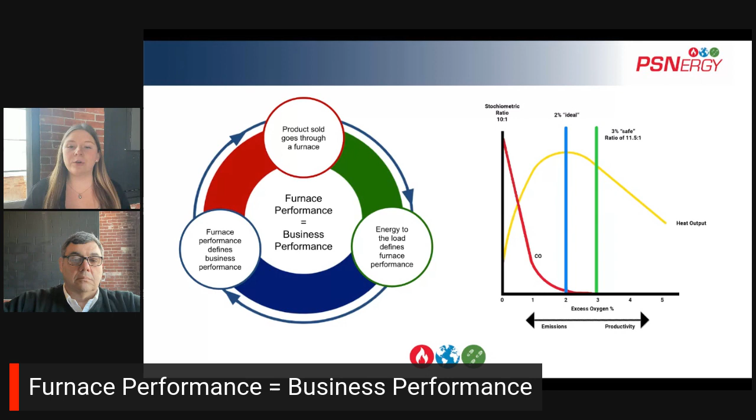and primary metals processing. Before we jump into it, let's do a quick recap. In our previous live event, we discussed the relationship between furnace performance and business performance, especially when everything you produce goes through a furnace. So fundamentally, we like to think of it that furnace performance equals business performance. And additionally, we reviewed that combustion is simply chemistry, and because of that, there is a right way to run it. And when you don't run it the right way, it can cost your business a lot of money.

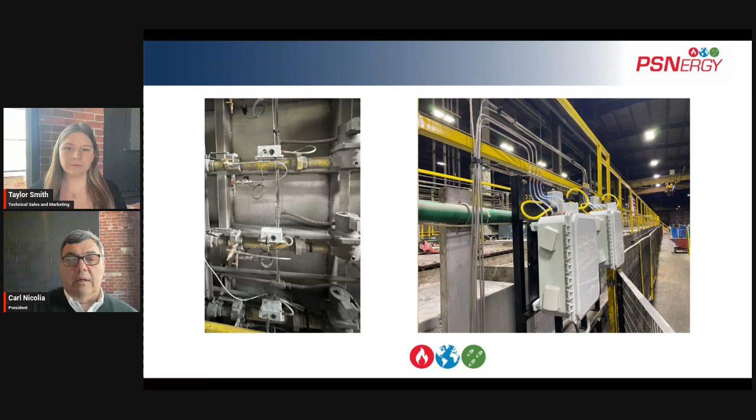Then we discussed the difference between I think my combustion is running well and I know it is running well. We don't accept I think in any other critical situations, so why should we accept it in industrial combustion when safety, quality, delivery, and business performance are all on the line? That's right. Remember, industrial furnaces are operating at very high temperatures, often in challenging environments, so they are constantly changing and degrading. And these combustion changes don't operate on a fixed schedule. So the only way you really know is monitoring; combustion monitoring is really key to operating your furnace and your business optimally.

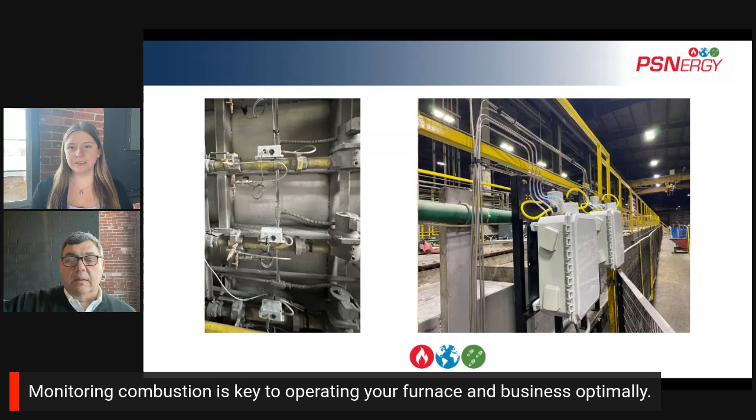And then we talked about a solution to monitor existing combustion processes. That's PSNergy's combustion monitoring and alerting system, which easily retrofits to existing open fire or radiant tube burner systems and delivers powerful data, allowing you to know that your combustion is running well. This is an example of the open fire monitoring dashboard. And really knowing that you're running combustion well gives you a firm foundation from which to make decisions and also to troubleshoot. You watch a lot of things in your process. Why wouldn't you monitor the first step, which is making the heat? Exactly, Taylor, right? Don't think, know.

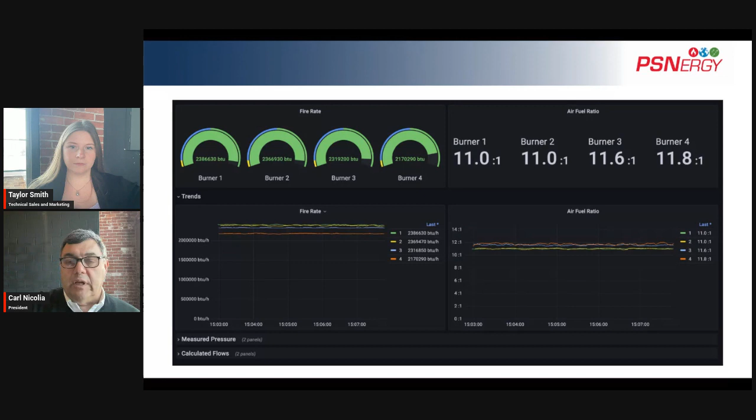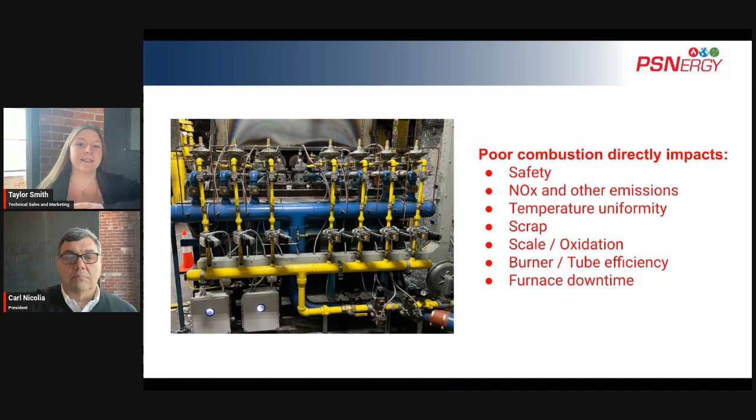Now, in this particular case, this customer has used our tuning services several times a year, but had not yet installed combustion monitoring. In this facility, CO alarms inside were going off, which was indicating a very unsafe work environment, which caused the production team to leave the work area, which of course led to unplanned downtime. So this furnace had to be shut down and production was stopped until our service team could get on site, make the proper adjustments, and get that process cleaned out and back to running combustion correctly. So essentially, poor combustion led to high emissions, which led to an unsafe work environment, and that drove unplanned downtime.

And in this case, the process was corrected and things went back to normal for a while because, as we've said, combustion's constantly changing. So there have been other situations where the problem kept progressing to legal actions against the company. Yeah, and so those costs of unplanned downtime and defending legal actions are staggering and can often run into the hundreds of thousands of dollars.

And really more significantly than that is the potential cost to your team if someone was hurt or sickened by a poorly operating process. So had these furnaces been retrofit with combustion monitoring and alerting, this emission problem would have been detected and corrected way before it shut down the operation or impacted any of the employees.

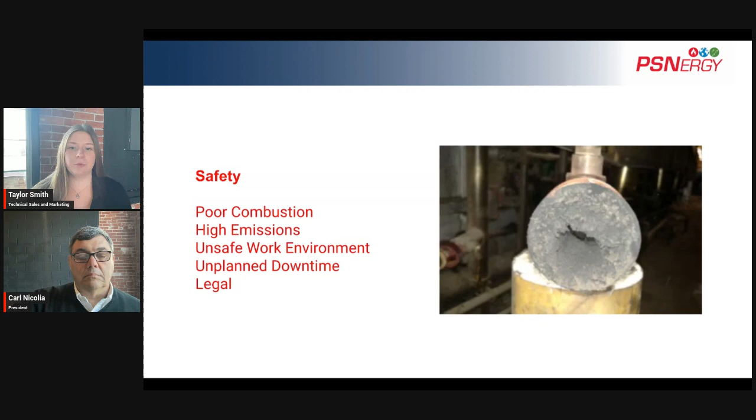So material on the right side of the furnace was processed correctly. Material on the left side of the furnace was not. And in this case, loads were often failed at QC and returned for reprocessing.

So the real cost here is not just the rework, it's the cost of inspection, lost capacity because it was being used to rework instead of producing additional product, and the cost of quality issues potentially being found by the customer. Right. We know that poor quality costs increase by an order of magnitude for each step away from the process. So 10x the cost at inspection, 100x the cost if it's found at a customer.

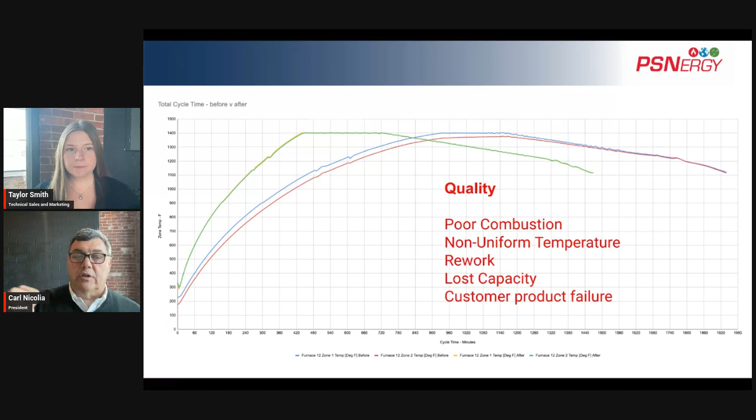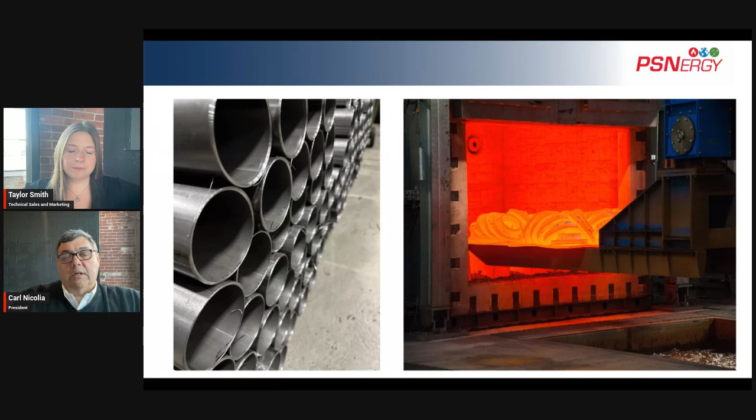Now on to delivery. These costs are often experienced by our customers and yet not necessarily recognized because they haven't seen the benefits of good combustion. They truly don't know any better without the data, and they don't know what they don't know. We all understand what the cost of one load or 1 hour of production is in our operation. And by optimizing combustion and getting the most out of every BTU of gas you buy, you can obviously produce more.

And this is really easily seen on a batch furnace, and it applies the same to a continuous process as well. So for ease of viewing, this is the same graph as before. And in this batch process, the customer ramps up to 1400 degree set point and then starts a controlled process cycle. And as you can see, the ramp times on this batch furnace drop significantly after implementing CMA and waste heat recovery solutions. So this specific customer saw an 8-hour reduction in their ramp cycle.

Cycle time to set point decreased 53% from 930 minutes to 440 minutes, which in this case allowed them to run more loads in the same amount of time. Right. Before implementation, that poor combustion led to extended ramp times, which led to tons of wasted capacity. And this wasted capacity led to lower production rates through the furnace.

So there are 5 of these exact furnaces at this particular location, which gave the customer 8 additional cycles per month after implementing our CMA and waste heat recovery solutions. And that's 40 more total furnace cycles per month, effectively giving them an additional furnace at their facility. So the real cost of poor combustion is the loss of revenue and profit on every one of those additional loads. Each load represented roughly $10,000 of revenue or an additional $80,000 per furnace every month. So annually, that's over $4.8 million just because they got combustion under control.

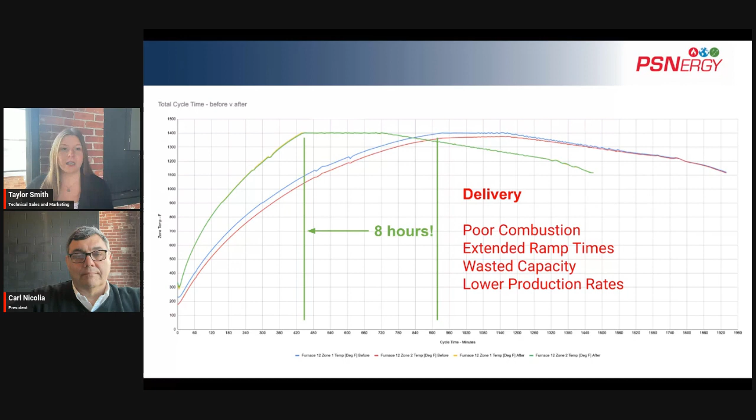And lastly, let's touch on cost. We think about customer costs in two ways: variable costs and component failures. In variable cost, obviously the most obvious is fuel.

In one particular example, we have a customer, continuous galvanizing line, that has a budget of $432,000 monthly for natural gas. And by maintaining combustion in the optimal range, this customer is able to save $30,240 per month, which equates to an annual savings of over $362,000.

Now, this is a huge number, significantly higher than the cost of combustion monitoring. Yet without monitoring, this customer would have never known how poorly the combustion process was performing, and would never have found that significant savings. And don't forget the equivalent reduction in emissions as well.

And each of these tubes costs anywhere between $9,000 and $15,000. So in this pile alone, there's over $120,000 worth of scrap. Utilizing the PSNergy solution allowed this customer to extend their tube life by 3x. We actually have a recent example of a customer that's needing to replace 2/3 of the radiant tubes on their 60 burner roller hearth furnace.

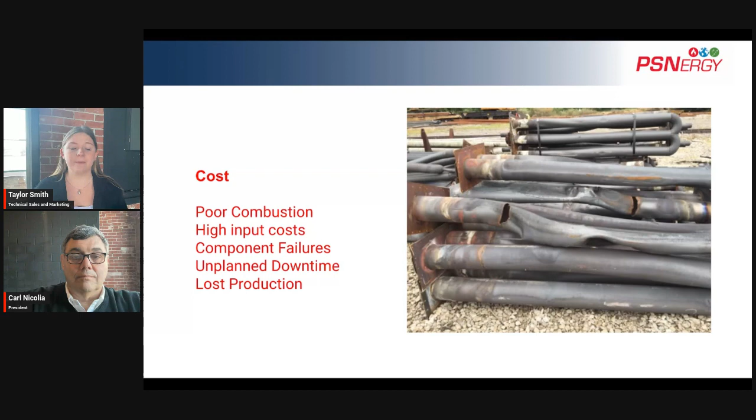Add to that number the cost of removing the failed tubes, installing new tubes, as well as the lost production time to do all of this work, and the total cost of poor combustion in this specific example is well over $750,000.

We've given a few examples of how poor combustion will impact your business performance in very real and significant ways, and you can see the business implications of not running combustion properly on top of those that we discussed in our last video. And these are big dollar amounts. Yet we've really only just scratched the surface with these few examples. And hopefully we've opened your mind to the broader implications and really the magnitude that poor combustion costs have.

And as Taylor said, these are big dollar amounts. And we like to think about, poor combustion is like an iceberg, right? What is easily seen is only the tip of the iceberg. There's so much cost and waste below the surface that's not easily seen, yet certainly could sink the ship. And the only way to recognize and truly eliminate those wasteful costs is to know you're running well, because you're monitoring combustion and getting the most out of every BTU your business buys.

And remember, if the product you sell goes through a furnace, performance directly impacts your business performance. And we all know that furnaces are inherently inefficient and constantly degrading. So if you aren't continuously monitoring your combustion, you're really putting your business performance at risk.